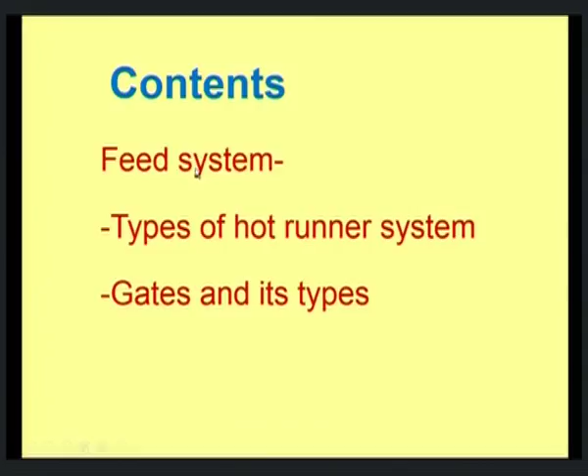In the hot runner system, there are two main types. One is called insulated runner, where, as the name implies, the runners are insulated from the mold. The other is heated runners, where the runners are heated without insulation. In the insulated runner, there is no separate insulation by any mechanical means; rather, the plastic melt itself will act as an insulating layer. How this happens, we will see shortly.

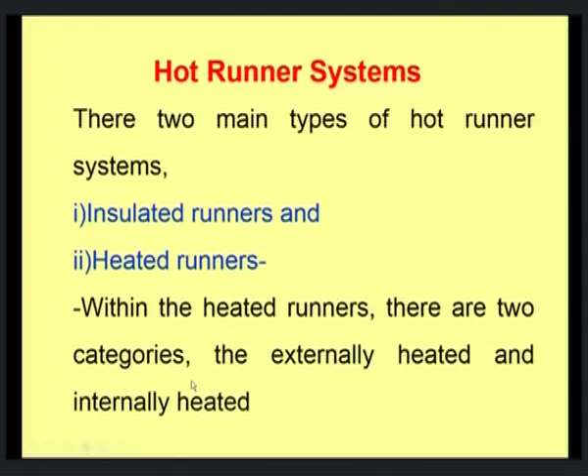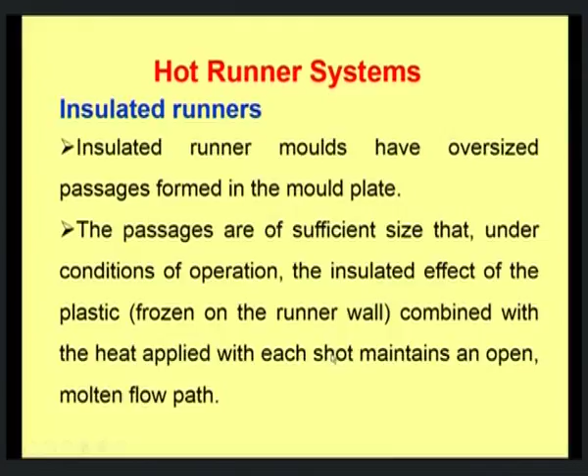Within the heated runners, there are two categories: externally heated and internally heated. First, the insulated runners. Insulated runner molds have oversized passages formed in the mold plate, meaning the dimensions of the passage are comparatively higher than in normal runner molds. The passages are of sufficient size that under operating conditions, when the melt passes through, the insulating effect of the plastic forms a frozen layer on the runner wall, which combined with the heat applied with each shot maintains an open molten flow path.

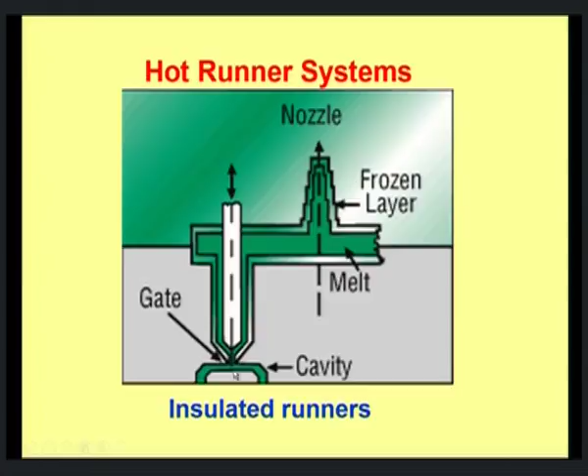You could see this is a typical insulated runner system. There is no separate insulating layer provided; rather, this is the melt passage, and on the surface of the runner wall, you can see the frozen layer of the melt. The plastic melt gets frozen or solidified, forming a layer over the runner, and this acts as the insulating layer. This is a typical gate, and that is how the melt fills the cavity.

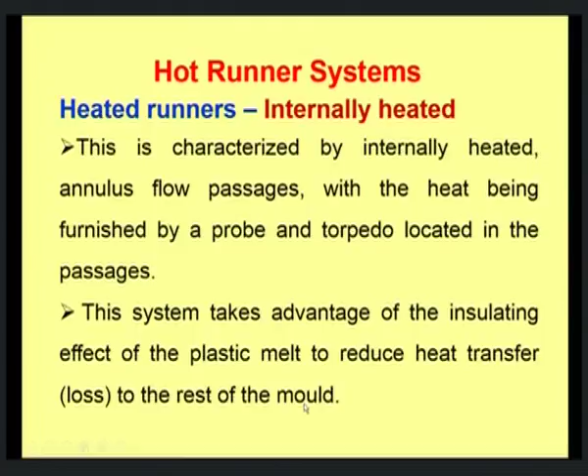Next, we move on to heated runners. In the heated runners, there are two types. One is internally heated, characterized by an annulus flow passage with heat furnished by a probe and torpedo, which is actually located in the passage itself. The heating element is provided in the passage itself. This system takes advantage of the insulating effect of the plastic melt to reduce heat transfer loss to the rest of the mold. So here again, the plastic melt itself acts as a barrier in heat transfer from the melt to the mold.

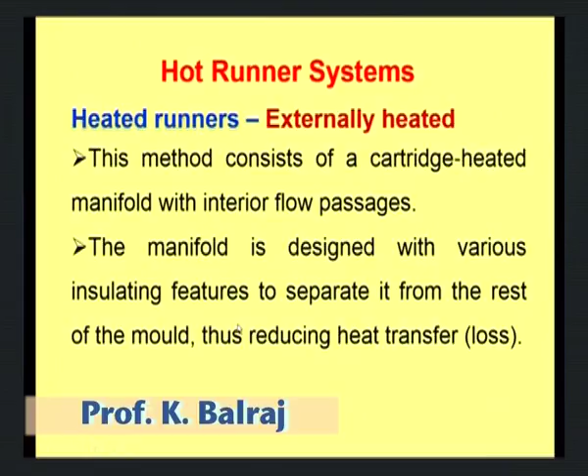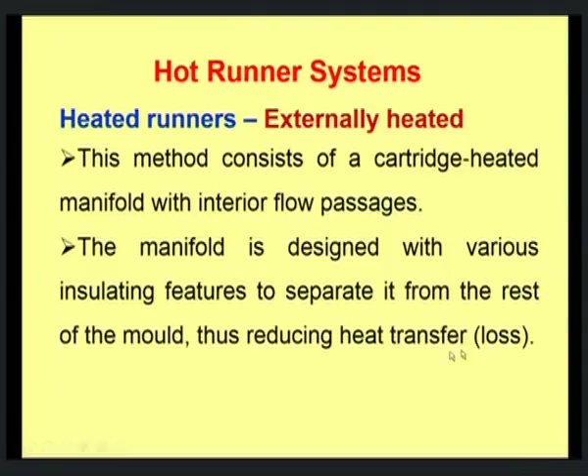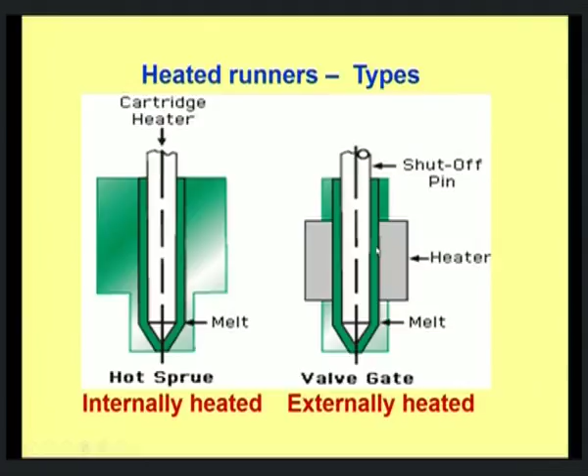Whereas in the externally heated, you can see the heater is provided externally. It's not located inside the runner; rather, the heater just surrounds the runner, and there should be insulating features that insulate the heat transfer from this melt to the rest of the mold. This shows cross sections of the flow channel in the actual manifold.

This polymer melt itself acts as an insulating layer, thereby reducing heat transfer from the heating element to the rest of the manifold. So one need not worry about insulation otherwise needed to prevent heat transfer from the heating element to the mold. Rather, whatever heat is produced by this heating element should be entirely supplied to melt the polymer and allow it to flow at appropriate properties.

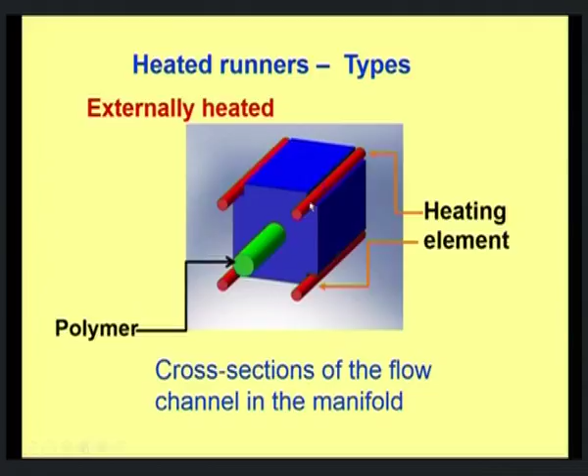In the externally heated system, the polymer is surrounded by a manifold block, and the heating elements are provided on the surfaces. Here too, the polymer melt acts as an insulating layer, preventing heat transfer from the resin to the block.

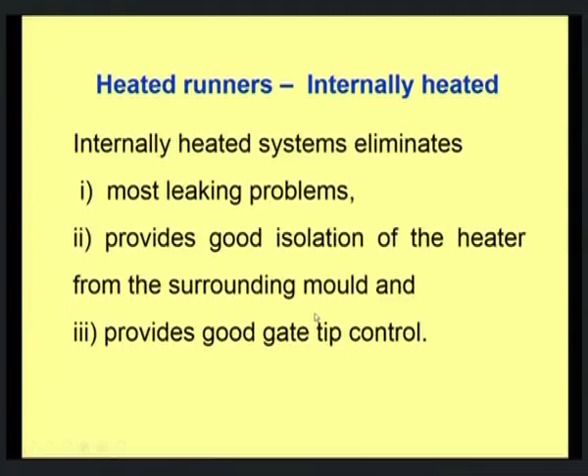Looking at the advantages of the internally heated system: it prevents leaking problems that would otherwise occur, and provides good isolation, acting as a barrier from the heater to the mold. It also provides good tip control, as the cartridge heater is provided on the passage itself, making the exit from the runner to the gate smooth. Since heaters are internal, there is no need for a separate manifold block that must be heated and insulated, reducing construction complexity and cost.

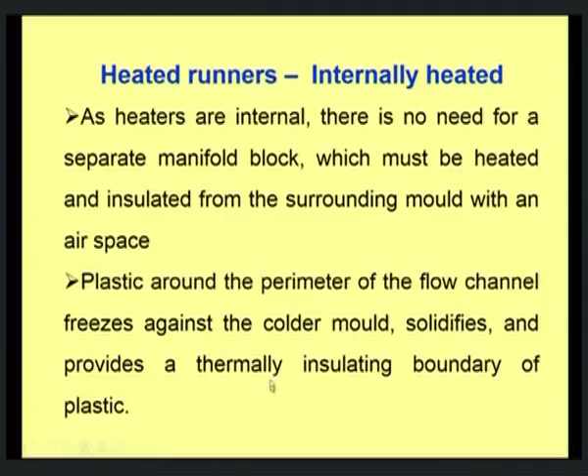Plastic around the perimeter of the flow channel freezes, acting as an insulating layer against the colder mold. Because it contacts the colder mold, it also solidifies, providing a thermal insulating boundary of plastic.

In the externally heated system, it has the ability to provide the lowest pressure drop, which is why we go for externally heated systems. Whenever the pressure drop is less, it reduces the cost of the machine as well as the size of the machine compared to other systems.

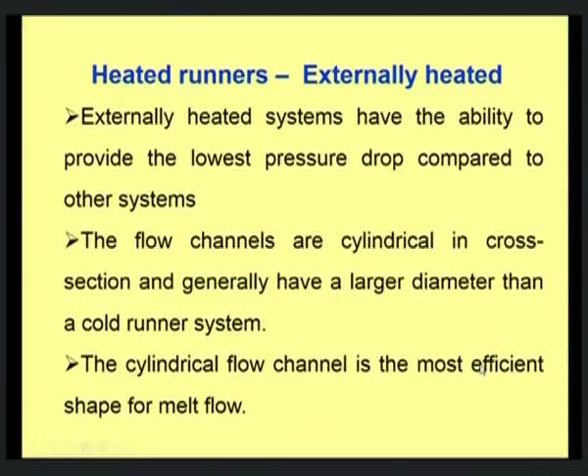The flow channels are cylindrical in cross section and generally have a larger diameter than a cold runner system. This is an advantage because the cylindrical flow channel is the most efficient shape for melt flow to take place. Next, we will move on to the gate.

What is a gate? A gate is an entrance through which molten plastic enters the cavity. This is a cross-sectional view of a typical mold: starting from the sprue, this is the nozzle, either from the injection molding machine or the extrusion molding machine. The resin from this nozzle enters through the sprue, followed by the runner.

At the end of the runner is the gate, which is the actual entry point. This is the first time the molten plastic crosses over and starts filling the cavity—these are the mold cavities. So we have the sprue, this region, then the runner, and then the gate.

This diagram shows that once the product is formed, it is ejected with the help of an ejector pin. While ejecting, we do not eject the part alone—we eject it along with the sprue, runner and gate, which are then discarded. This is waste material from a secondary operation or post-processing, where these parts are removed and thrown out. However, the design of the sprue, runner and gate has a direct effect on the cost as well as the quality of the formed product.

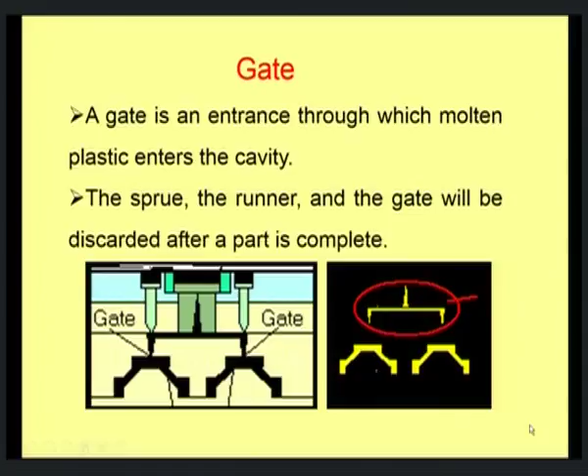Looking at the functions of the gate: its main function is to restrict flow, because the plastic comes from a wide region and must pass through a very narrow region before entering the mold cavity, restricting the direction of the molten plastic. It also has to simplify cutting of the runner and moldings to simplify finishing of parts—as seen earlier, the sprue, runner and gate are trimmed out, so finishing operations should not pose a challenge.

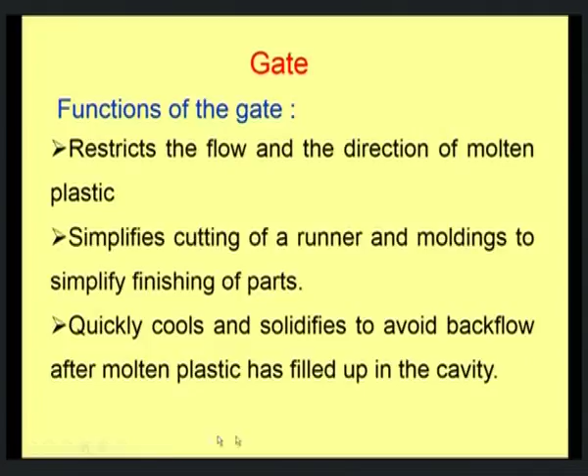The gate also has to cool quickly and solidify. If that is not the case, backflow of molten plastic will take place—the plastic filling the cavity could start flowing in the reverse direction if the gate doesn't solidify. Therefore, it has to cool and solidify quickly to avoid this backflow.

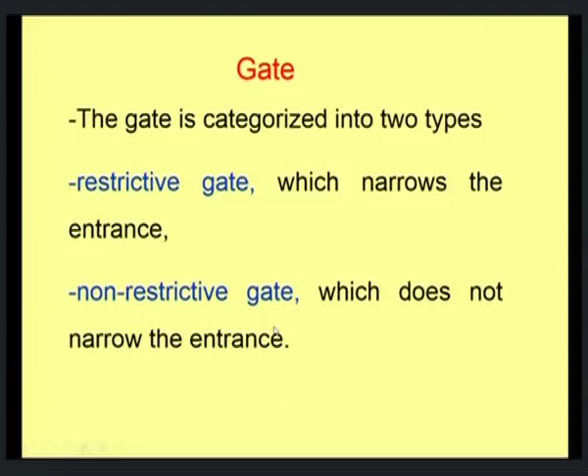If you look into the ways of classifying gates, one way is to categorize them into two types: restrictive and non-restrictive gates. In the restrictive gate, the dimensions of the entrance, that is the width or diameter, are reduced and restricted. In the non-restrictive gate, there is no such restriction in the entrance or the dimensions of the passage for the molten resin to fill the cavity.

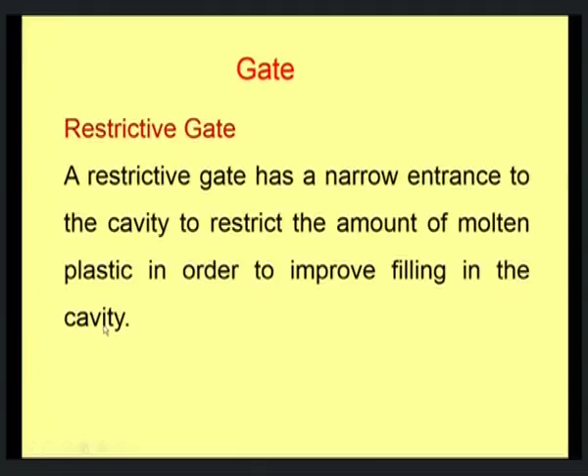A restrictive gate has a narrow entrance to the cavity to restrict the amount of molten plastic in order to improve filling in the cavity. This improves the way the resin fills the cavity. The polymeric resin, once melted, is highly sensitive to temperature, since its viscosity depends mainly on temperature. Therefore it has to fill the entire volume of the mold cavity at the same temperature and viscosity, otherwise the product formed will not be uniform.

If you look into the features of the restrictive gate, it generally generates shear heat by going through a narrow gate. Because flow is restricted to a very narrow passage, heat is automatically generated as the plastic polymeric melt shears on the surface of the mold, raising the temperature of the molten plastic. This increases the temperature of the molten plastic, improving the filling in the cavity, and also reduces any residual stress formed in the melt.

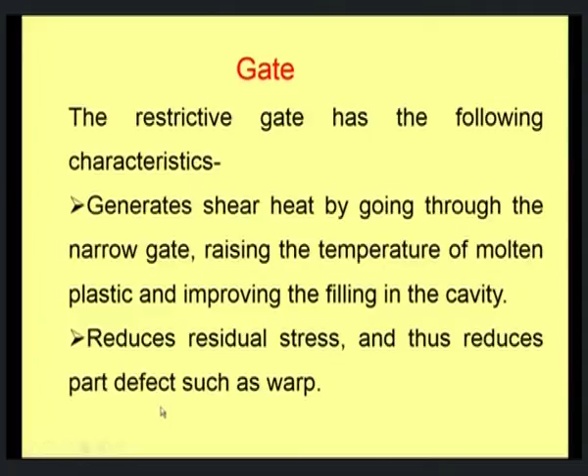Once you improve the temperature, the residual stress goes away. Residual stresses form in the melt because of polymeric entanglements. Once there is a sudden drop in temperature, these polymeric chains try to coil again. If you increase the temperature, they uncoil, and in the process release all the residual stress that is stored. This reduction in residual stress reduces part defects such as warp.

Warp is nothing but a reduction in the mechanical properties of the final product. Also, as the cooling and solidification time is shortened, the molding cycle is also shortened, so the cycle time is less. As the gate trace is less, it is possible to complete the finishing process in a short time, so there will not be much trace of the gate left in the final product formed.

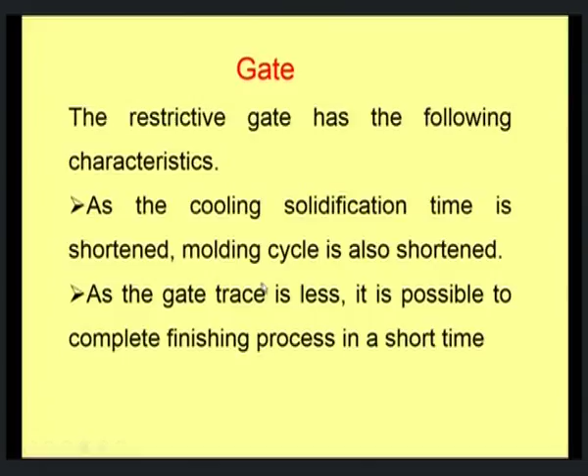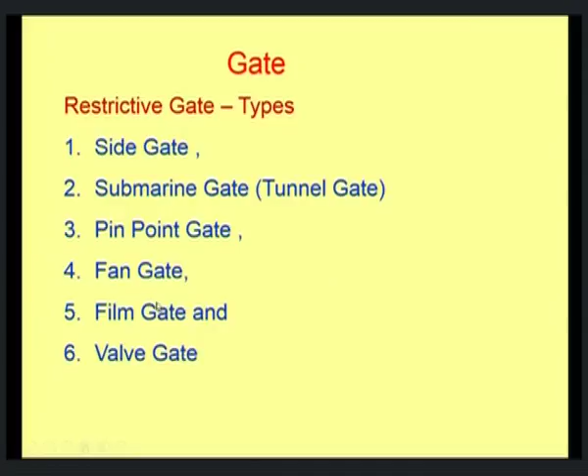Now let's look at examples or different types of restrictive gates. The major types are: the side gate, where resin enters through a side; the submarine gate, which acts like a submarine that goes down and can come up, similar in functioning; the pinpoint gate, where resin enters through a very sharp point; the fan gate, generally used for optical products; the film gate, used when preparing a flat product; and the valve gate. We will see each one by one.

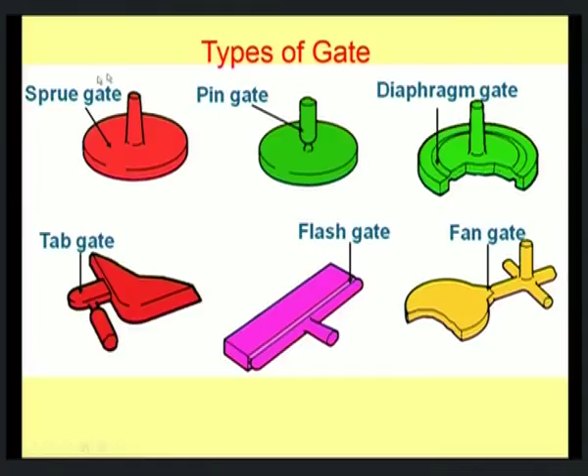This is a three-dimensional diagram representing all these gates: the pin gate, flash gate, and fan gate. These are examples of a restrictive gate. The diaphragm gate, tab gate, and sprue gate are all examples of a non-restrictive gate.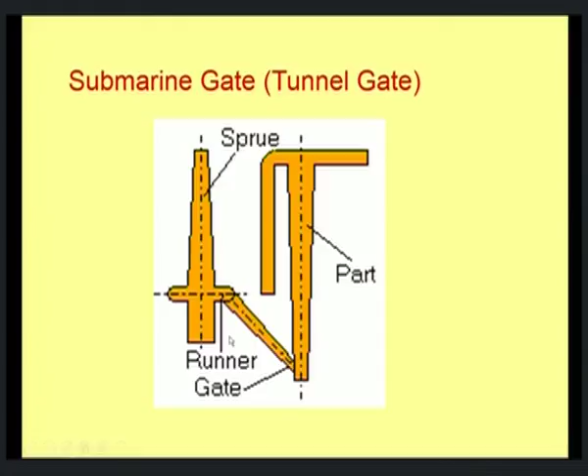This is a typical submarine gate: the sprue followed by a runner, and from the runner, the submarine gate or tunnel gate. Once the product is ejected, this part would go up, and in the process the gate would also move up and be cut off from the mold. Next is the restricted gate, or pin gate.

This is a typical diagram of a pin gate, where the entry of molten plastic is through a very narrow region, which is why it is called a pin gate. This type of gating is again used for multi-cavity molds.

Finishing operations can often be eliminated because the gate itself is of small size and will automatically break off during ejection of the molding. The gate must not be too small, otherwise filling of the cavity is impaired. Even though the dimensions of a pin gate are very small, one has to optimize it so the cavity is filled at an optimum rate.

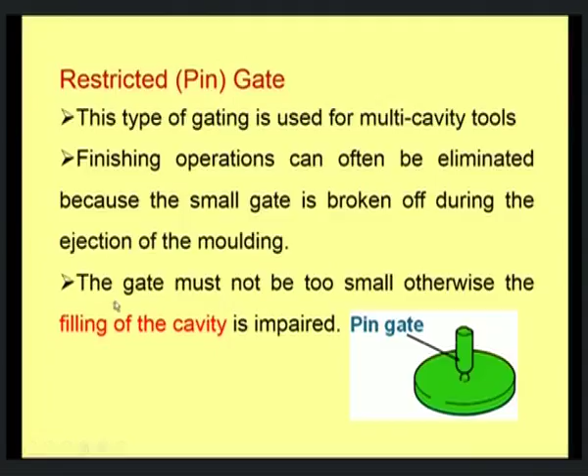Under the effect of high injection pressures, frictional heating also develops as material passes through the gate, which could lead to splash marking and burning on the finished component. These are some of the drawbacks. When the plastic is injected at very high pressure, this could result in splash marks on the surface, making it appear as though the product is burnt.

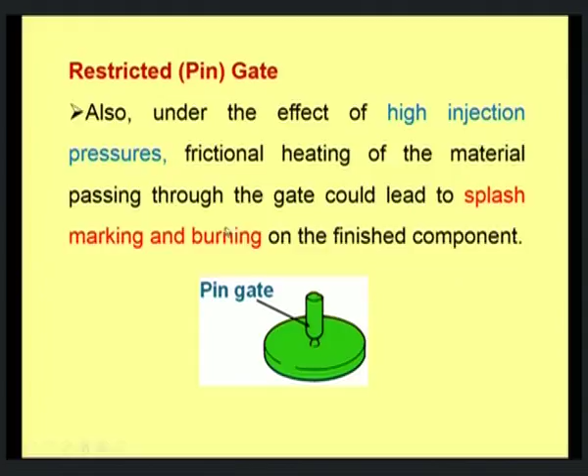Next, we move on to the fan gate, used for thick section molding such as optical lenses. Nowadays people go for optical lenses instead of wearing spectacles, and those are prepared using a fan gate. This enables the runner to be made of an adequate size to help prevent the material from chilling off. Once the gate size is thicker, as the melt flows through it, the region behind it will slowly start to solidify, so adequate size has to be provided.

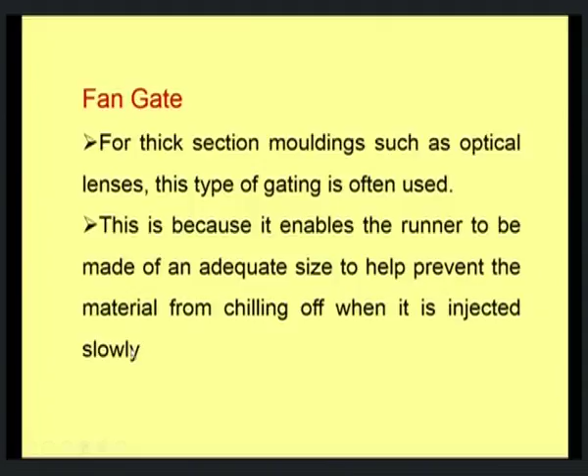This happens particularly when it is injected very slowly, which helps the forming material to solidify. It also allows sufficient follow-up pressure into the cavity during cooling contraction. Once it is solidified, the correct pressure has to be maintained for the product to be formed. This is a typical example of a fan gate, usually used to prepare optical products.

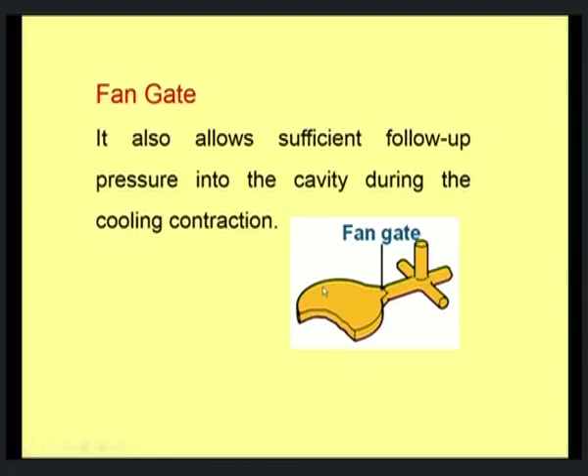Next is the film gate, also called the flash gate. This is a typical diagram showing the flash gate. The polymeric resin enters through this direction. This gate type can be used successfully for long, flat, thin-section components. It enables a large cavity to be filled quickly and consistently because there is a very wide region here, so a large cavity can be filled in a short time.

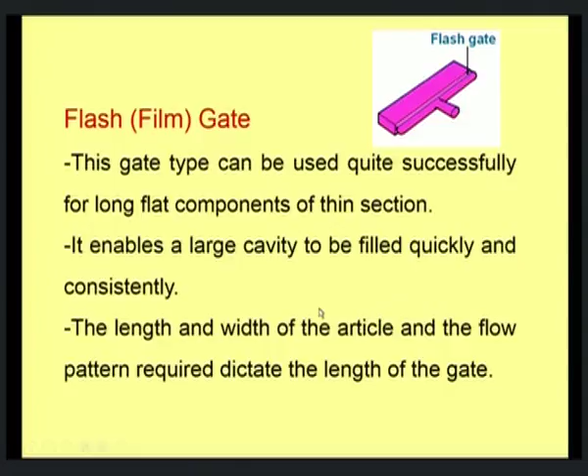Of course, the thickness should be less. The length and width of the article and the flow pattern required will dictate the actual length of the gate, depending on the length and width of the product being prepared.

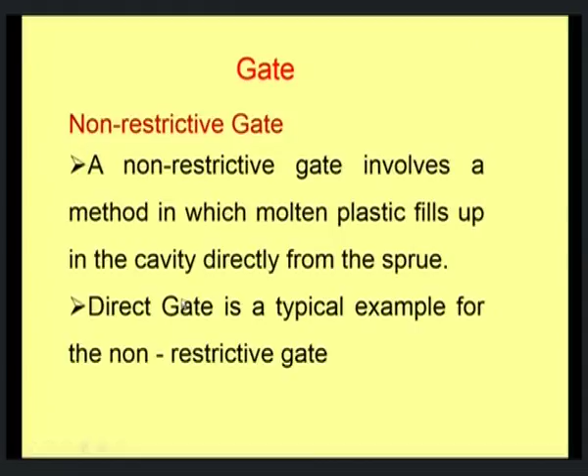Next, we move on to the non-restrictive gate. This involves a method in which the molten plastic fills the cavity directly from the sprue, so there is no gate at all here—instead, resin from the sprue straight away fills the cavity. The direct gate is a typical example of a non-restrictive gate.

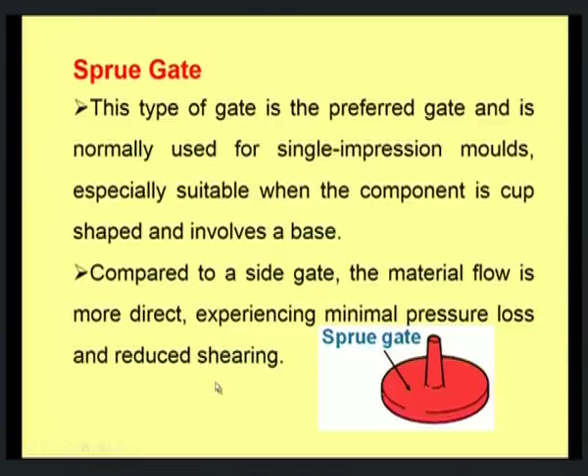Compared to a side gate, the material flow is more direct, resulting in minimum pressure loss and reduced shearing rate required. However, this can result in high stress concentration.

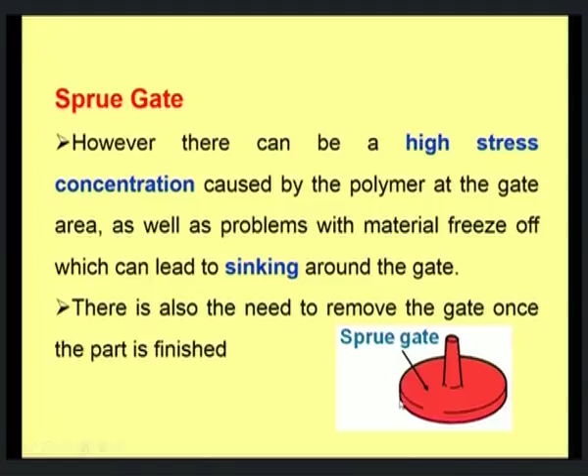The high stress concentration occurs at the surface of this product, caused by the polymer at the gate area, as well as problems with material freeze off, which can lead to sinking. Sinking is the polymer solidifying prematurely before it is converted into the product, and this particularly takes place around the gate. There is also a need to remove the gate once the part is finished, which requires secondary or post-processing operations.

Next, we move on to the tab gate. This type of gating can be used as an alternative to side gating, because here also the resin enters through a side. Instead of entering sideways directly into the product, an elbow-shaped provision is given, which is what we call a tab. The resin flows through this tab, and then starts filling the mold cavity.

This is the product that is going to be formed, and this is the mold cavity. This tab gate is suitable for multi-impression molds, and it is also suitable to produce articles of a flat or shallow nature. That means one cannot go for a part or product that involves more depth.

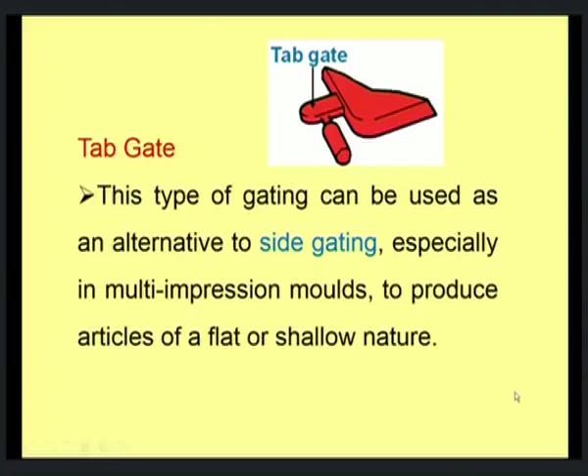Now, if you look into the advantages over normal side gates, here the design minimizes the jetting of the material. Jetting of the material is the resin trying to forcefully enter through the mold cavity. This can be reduced because it is passed through a tab before entering the cavity, which will minimize this jetting effect.

What happens with respect to jetting is the formation of weld lines and flow marks. These are surface irregularities formed on the product. This will actually reduce its aesthetic look, as well as have a great effect on the mechanical properties. These flow marks will also result in reduction in dimension, particularly when you use that component to be fitted into another place where the provision is given exactly as per the dimensions.

It also creates turbulence because it takes an elbow-shaped flow. This turbulence will help in dispersing, particularly when you use a dry colored material. One can also add the colorant in the runner itself, so that complete dispersion of the colorant with respect to the resin takes place.

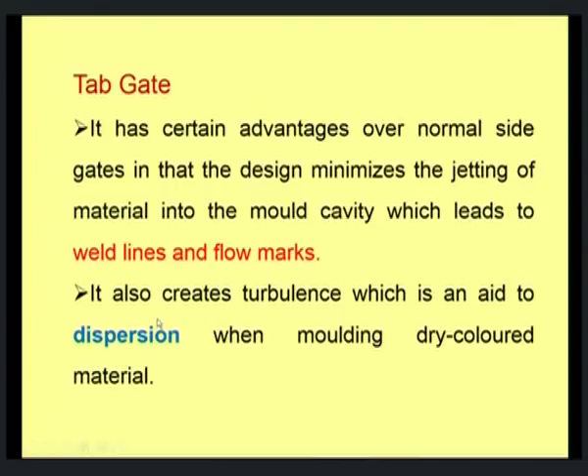Next, the diaphragm gate, which is also called a disc gate. This is a typical example of a diaphragm gate. In the diaphragm gate, a hollow space is available, a circular hollow space inside the cavity. A diaphragm gate is often used for gating cylindrical or round parts that have an open inside diameter, so this inside portion is open.

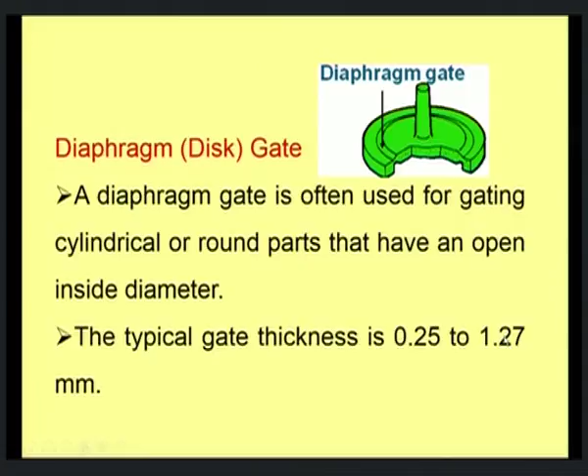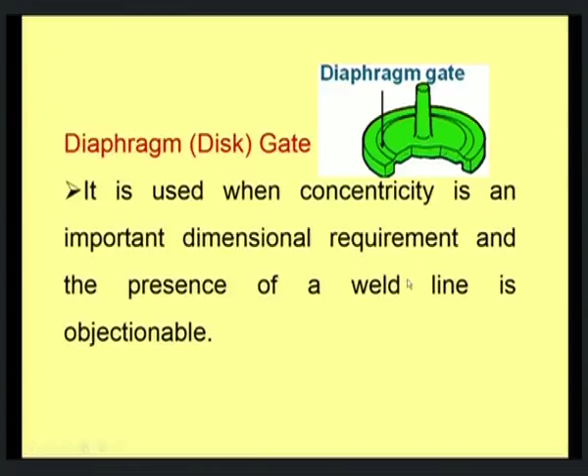The typical gate thickness is about 0.25 to 1.27 mm. It is used when concentricity is an important dimensional requirement, that is, the symmetry of the product is more stringent, and the presence of a weld line is objectionable. Because of this arrangement, there is less possibility for a weld line to form on the surface of the product. This gate is essentially a flash gate around the inside edge of the part rather than on the surface of the product.

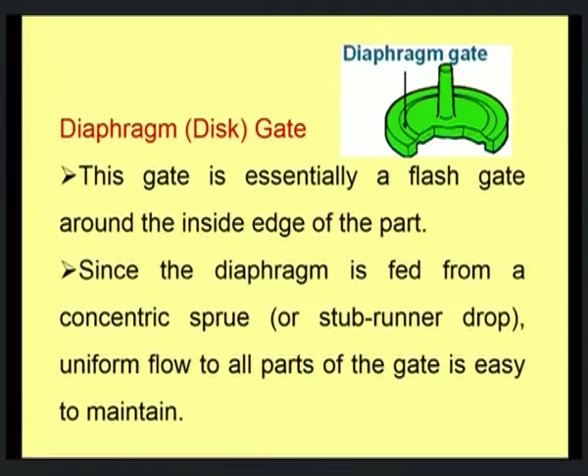Here this diaphragm gate is a flash gate around the inside edge of the part. This is the inside edge. Since the diaphragm is fed from a concentric sprue or a stub runner drop, uniform flow to all parts of the gate is easy to maintain. Therefore, one can ensure that the entire region of the cavity is filled at an appropriate, more uniform rate.

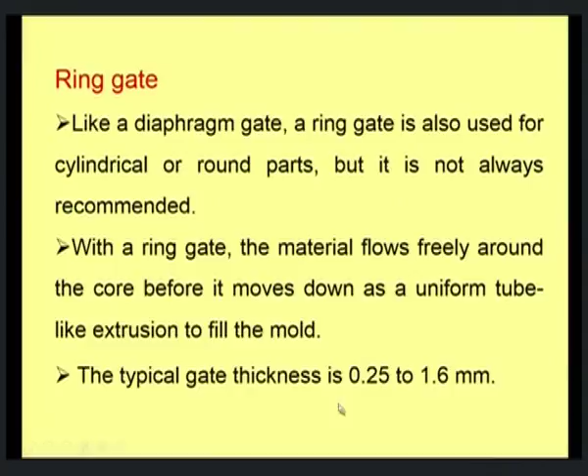Next we move on to the ring gate. Like a diaphragm gate, a ring gate is also used to prepare a cylindrical or round part, but it is not always recommended except for specific applications. With a ring gate, the material flows freely around the core before it moves down as a uniform tube-like extrusion to fill the mold. That is why it is called a ring — it first flows like a uniform tube-like extrusion before it starts filling the mold. The typical gate thickness is again 0.25 to 1.6 mm.

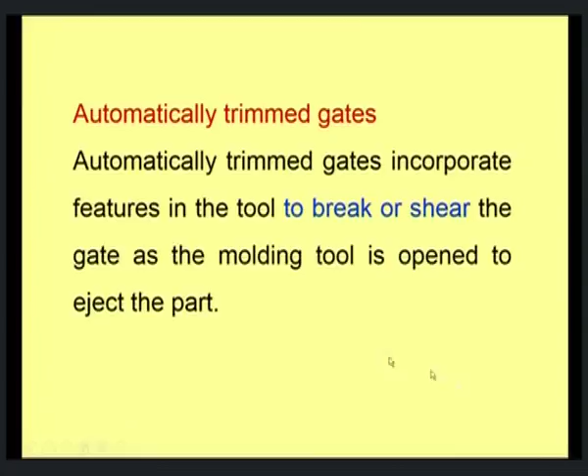Now, the next way to classify gates is whether they are trimmed automatically or manually, because once the product is ejected out, the sprue, runner and gates are all trimmed out. Automatically trimmed gates incorporate features in the tool to break or shear the gate, thereby removing it as the molding tool opens to eject the part. Normally, automatically trimmed gates are used to avoid gate removal as a secondary operation, particularly in automatic molding machines where the product has to be formed instantaneously without any post operation, and also to maintain a consistent cycle time for all shots.

The normal problem with manually trimmed gates is that the cycle time would vary for each and every shot, and that affects the product being formed. Cycle time is the actual time starting from when resin is injected through the nozzle, the time it takes to flow through the runner, fill the mold cavity, and then cool or solidify to form the final product. If this cycle time changes for each injection shot, it will not result in a product with uniform properties.

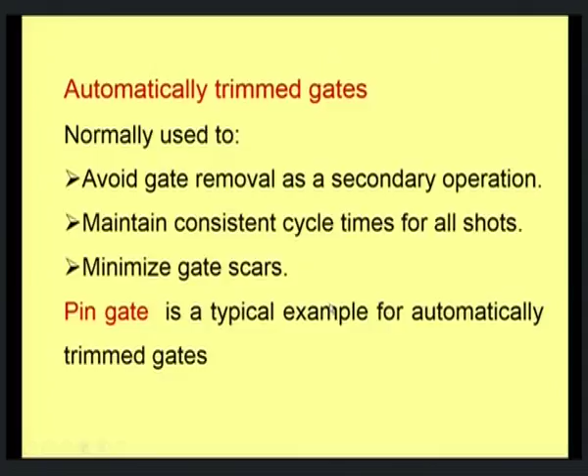This also minimizes gate scars, which are nothing but traces of the gate carried over the product even once the gate is removed. The pin gate is a typical example of automatically trimmed gates.

Next, the manually trimmed gates. These are gates that require an operator to separate parts manually from runners during a secondary operation. The sprue gate, tab gate, edge gate, fan gate, disc gate, and flash gate all come under manually trimmed gates.

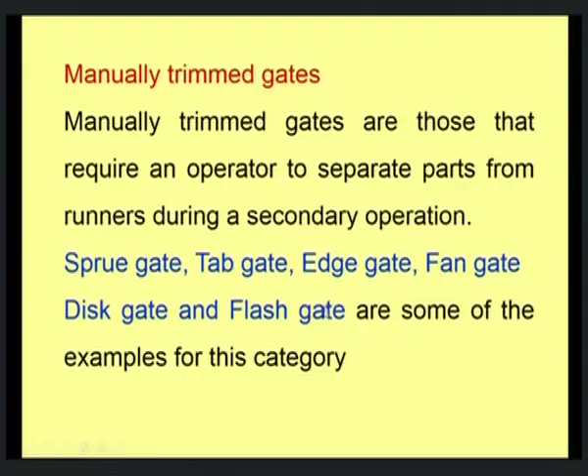Despite the number of advantages with automatically trimmed gates, the reasons why we go for manually trimmed gates are: the gate is too bulky to be sheared from the part as the tool is opened. Once the mold is opened and the product is ejected, the gate is too bulky. This usually happens particularly when preparing a product of more thickness or more depth, where one has to increase the dimensions of the gate, making it too bulky to be sheared.

Also, some shear sensitive materials, particularly PVC, are more sensitive to shear and should not be exposed to high shear rates. This is inherent to the design of automatically trimmed gates, which are designed in such a way that they are normally subjected to a very high shear rate.

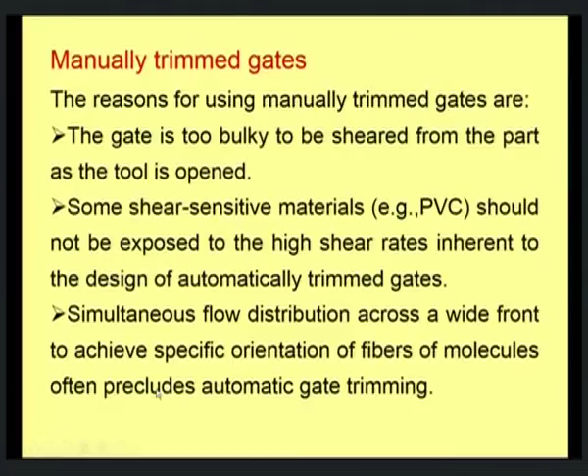Simultaneous flow distribution across a wide front to achieve specific orientation of fibers or molecules often precludes automatic gate trimming. Nowadays, even with thermoplastics, we go for reinforcements in the form of fiber only to ensure that flow distribution is uniform. So, in all these cases, we go for manually trimmed gates.

The next important thing with respect to the gate is determining the correct position of the gate, that is, where to provide the gate with respect to the product or part. These are the points to be considered.

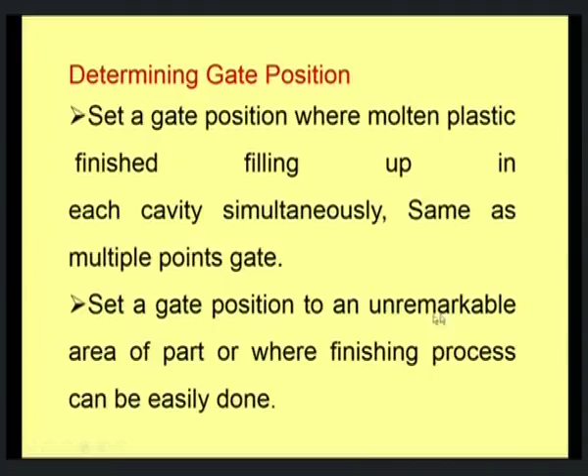Set a gate position where the molten plastic finishes filling up each cavity simultaneously, same as with multiple point gates. Also, set a gate position to an unremarkable area of your part, or where the finishing process can be easily done.

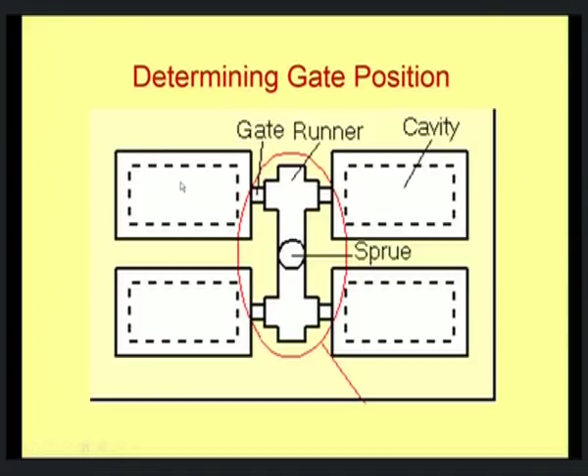So here are the gate positions. You could see all cavities would be filling up simultaneously without any lagging, and removal is also easy. The other point is to set a gate position at the thickest area of your part.

Wherever the thickness of the part is more, that's where one can provide the gate. This will avoid sink formation due to mold shrinkage, and also allow the filling up of molten plastic using the wall surface in order to avoid generating jetting.

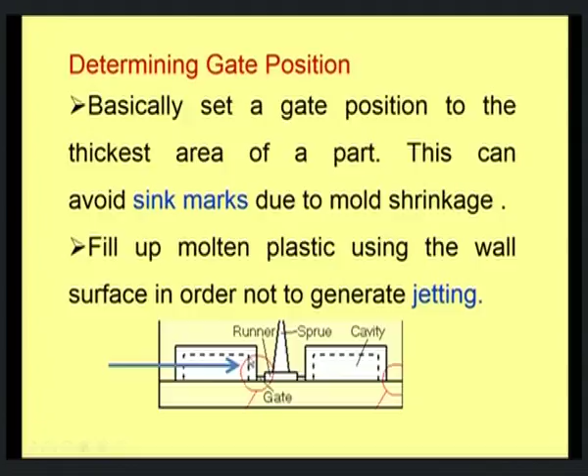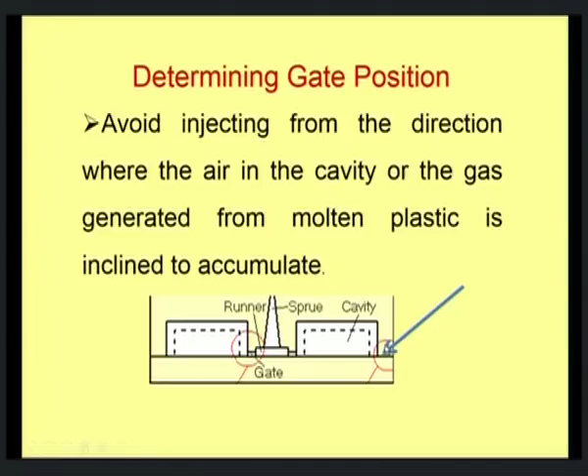This is a typical case where the thickest part of the product is the location where the gate is provided. Also, avoid injecting from the place where formation of air or gas is generated from the molten plastic. Therefore, one should avoid providing the gate there. So these are the things to be considered.

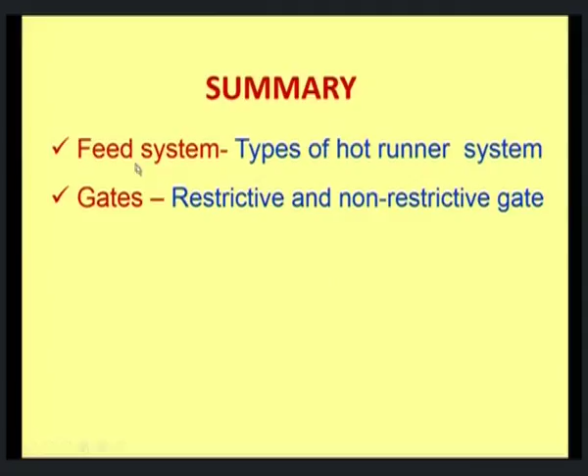To summarize, today we have discussed the final part of the feed system, which is more about the hot runner system and the gates. In the gates, we discussed the restrictive and non-restrictive gates, the design features of a gate, and the position of the gate, that is, determining the correct position of the gate. This completes the feed system.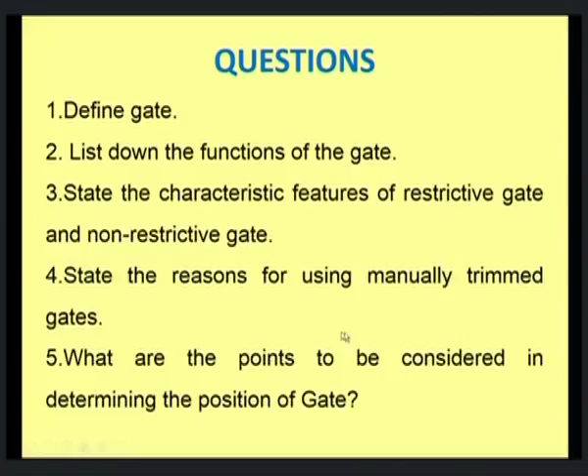After looking into this episode, these are the questions the viewers should try to answer. Define gate. List down the functions of the gate. State the typical characteristic features of a restrictive gate and a non-restrictive gate. State the reasons for using manually trimmed gates, why we go for using them. What are the points to be considered in determining the position of the gate? Thank you.